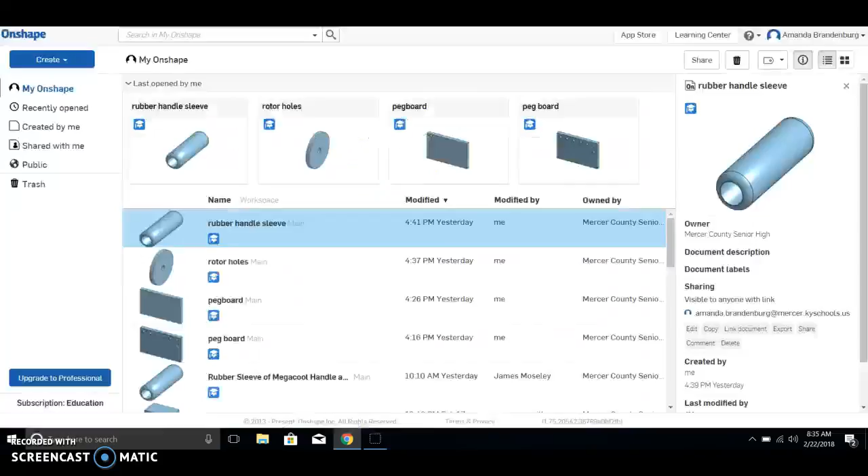We're now going to make the part called drilled holes. I'm going to go into Onshape, hit create document, call it drilled holes, and hit OK.

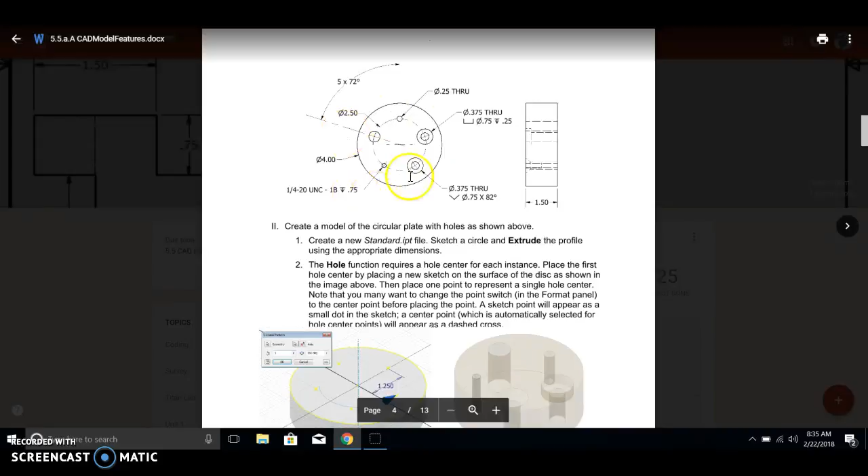The outside diameter of the bigger circle is 4 inches, and I'm going to extrude it 1.5 inches. So I'm going to do sketch on a plane. Again, I like to look at that plane, so I'm going to click front. I'm going to do a circle with a diameter of 4 and hit enter, and then extrude that 1.5 inches.

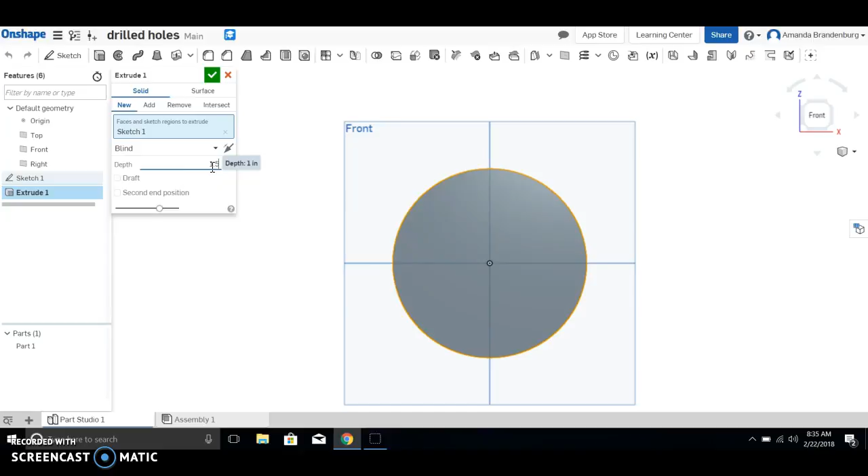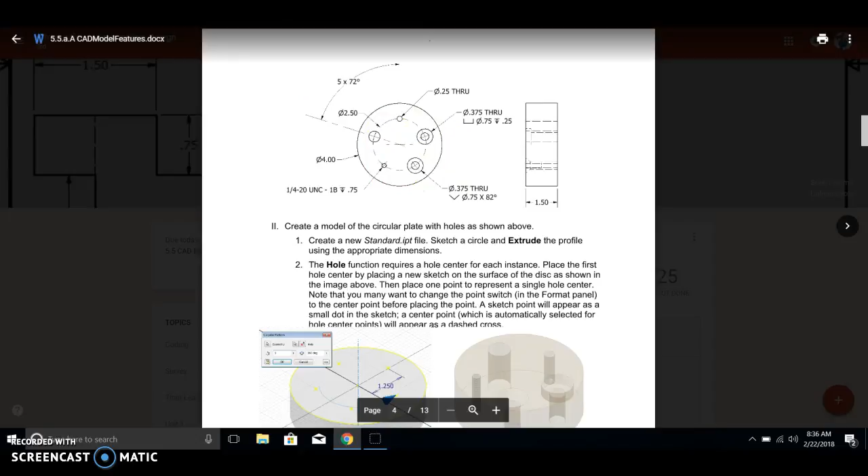Okay, so now I have that cylinder where I'm going to drill all those holes. I'm going to check that off. Now if I look, all these drilled holes are around a circle that has a diameter of 2.5, and they're all perfectly spaced out. So I'm going to do a sketch on the face of this cylinder of a circle with a diameter of 2.5.

In order to space out all those points perfectly, I'm going to do a point on the top of this circle. Okay, so I just chose a point and put it on the top of the circle. I don't want to have to measure every single one of them, so I can do a circular pattern.

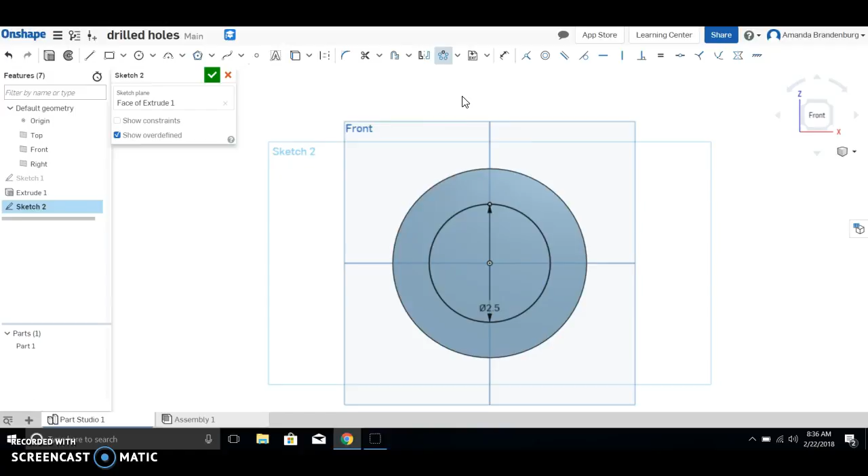So I drop down here. The first option is linear pattern. You'll use that if it's a rectangle. Circular pattern is if it's a circle. So I'm going to choose circular pattern, and I'm going to choose that point because that's what I want it to pattern.

Right now it's saying it's going to do 3 of them. I'm going to double click on that and make that a 5 and hit enter. Now it will give me 5 perfectly spaced points. Each of these is going to be one of the holes that's on this part.

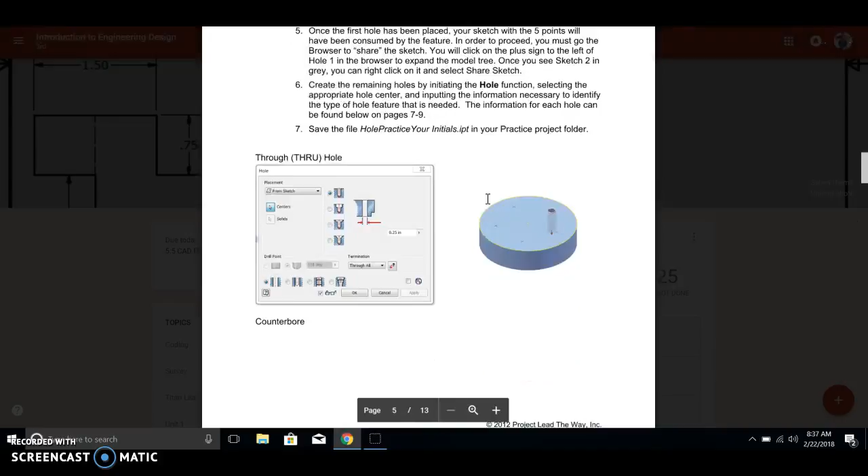If you scroll down, there's more information about each hole, so we're just going to do them one at a time. This first one is a through hole that's 0.25 all the way through. So I'm going to click that first point, come up here and choose hole, and go simple through 0.25, so that one's already done for me.

If you notice my sketch disappeared, we can get it back if we hover over sketch 2 and click on that slash over the eyeball so that it will show me sketch 2 again. So I'm just going to click there so it pops back up, and I'm going to click my next point and do hole again.

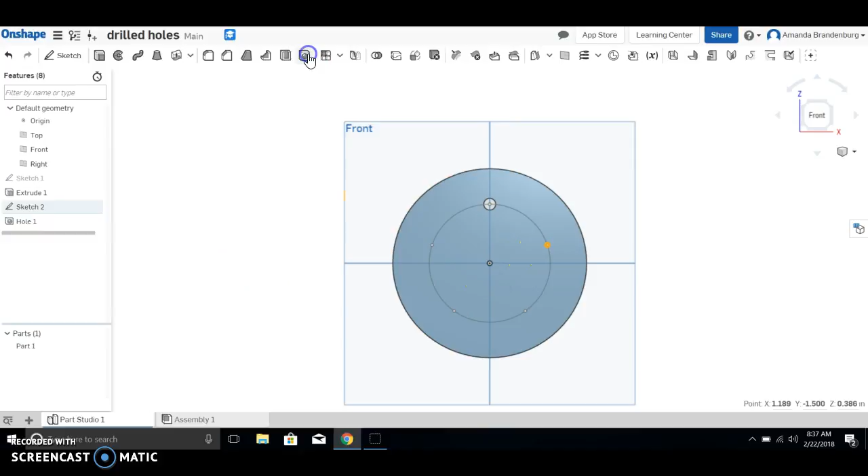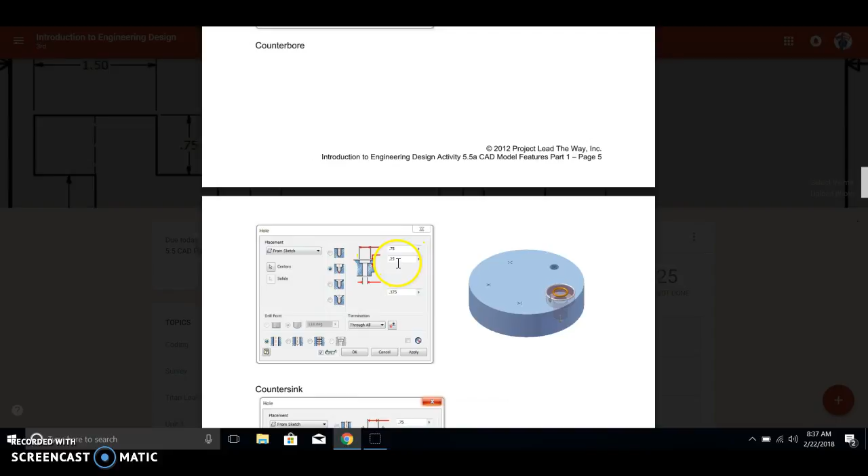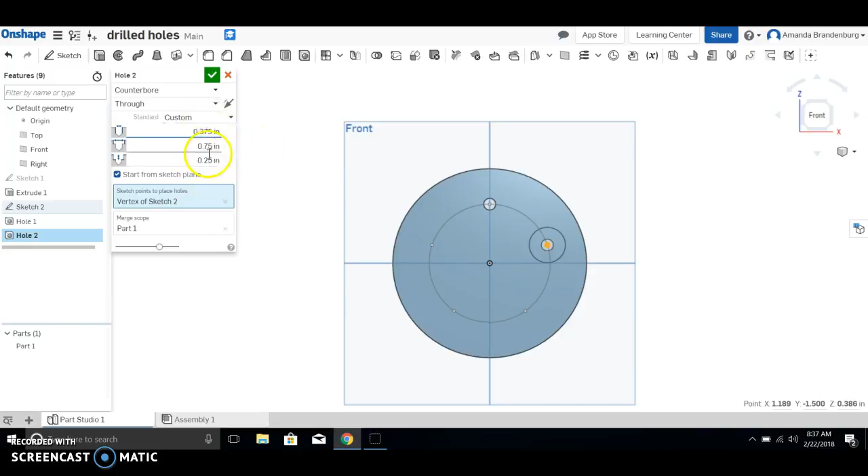The second hole is a counter bore, which means it's bigger up top. The top width is 0.75, the depth is 0.25, and then the next width is 0.375. So it's not simple anymore, it's a counter bore. I just typed in all my numbers, and I'm going to hit check, and now that's giving me that counter bore type hole.

If I scroll down, the next one is called a counter sink. So I'm going to come up here and click my next point, and go hole, drop down and do a counter sink. If I look, it tells me the degree is 82. It's 0.75 and then 0.375. So I'm going to change my degree to 82.

The top width is 0.75, and the bottom one is 0.375. And I'm going to hit check. Okay, so that made my countersink.

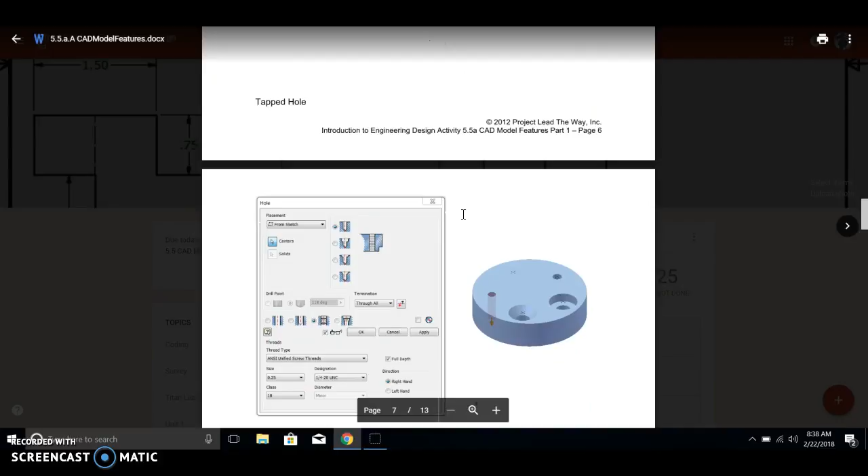The next one is called a tapped hole. That means it's threaded, and it has a size of 0.25. So I'm going to click the point, go to hole, go simple again, all the way through, and it's 0.25. And then to get the thread, I come up here to this ANSI. And then it's actually 0.25. It changed it. Okay, so now I've got my threaded hole.

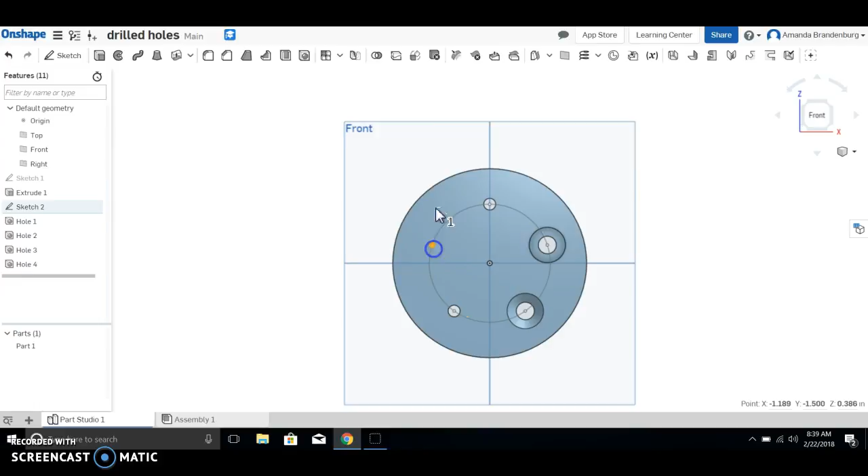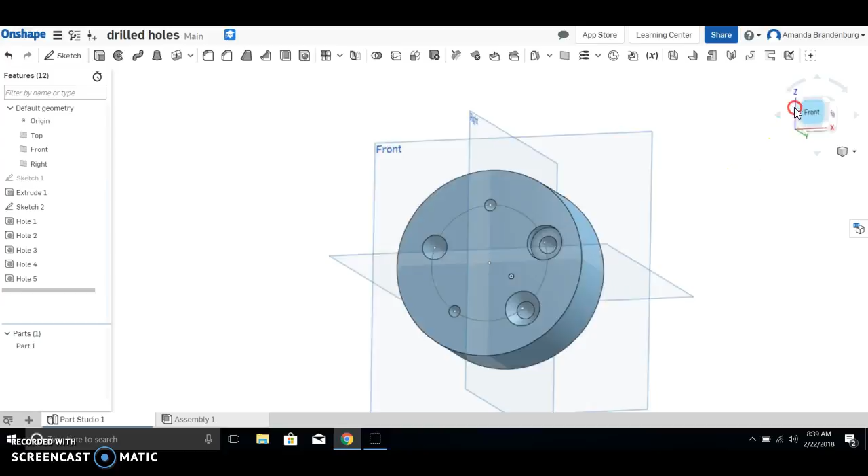And then my last one is just a basic clearance hole of 0.531. So hole, simple, and it's 0.531. I'm going to hit check. Okay, so now if you look, it's made all of our holes, and then you'll just share it on Google Classroom by sharing your link and copying it and turning it in on Google Classroom.